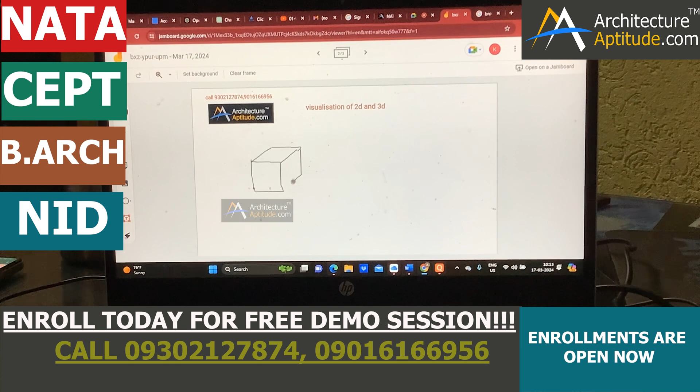Working now on the basis of planes. Okay. So you have to understand here that we will start with the simplest of objects, which is the cube. Now say that's a cube kept in front of you. Visible? Yes, ma'am. What do you see? Simply, can you conclude what do you see? Square. Only a square? Square faces. Square. Lines. How many faces? I can observe 3, ma'am. Actually, there are 6. Perfect. So that means you are talking at 2 levels.

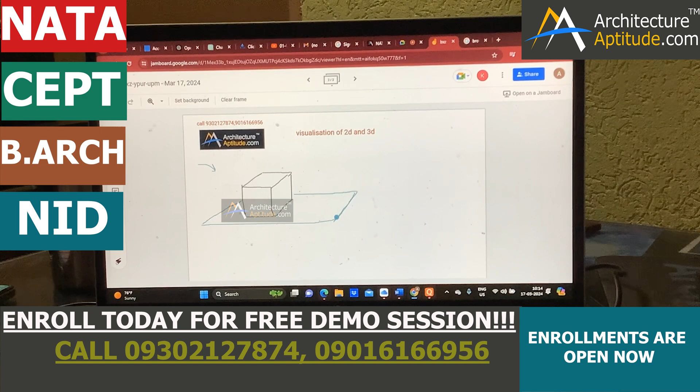Now look at this. Suppose you are standing here and the green base, this is the surface area over which the cube has been kept. Okay. Now currently Arjun is standing here and you are looking at it this way, right?

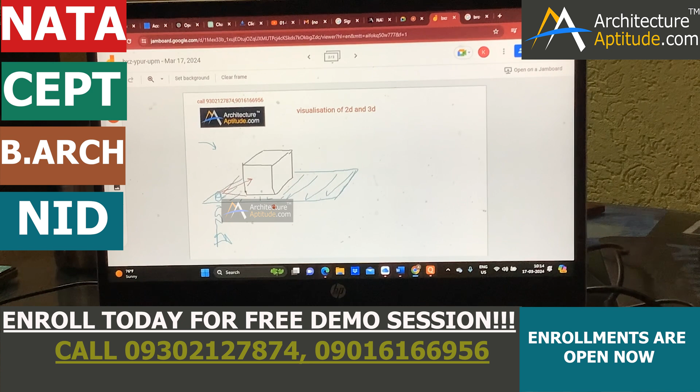Can you see that? Ma'am, your voice is breaking. Can you hear me now clearly?

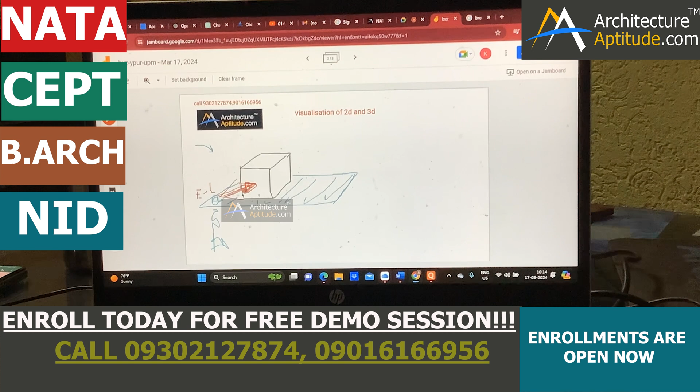Yes, ma'am. Good. So I'm asking you that you are standing here and you are looking at the object which is a cube placed at your eye level. Okay. Now what do you see? If you're standing at this position from where I have marked the red arrow, what will you see? Can you relate from the marking position? Just a square, ma'am. Just a square. Too good. So that means since it's at your eye level, you will just be seeing the red square, right?

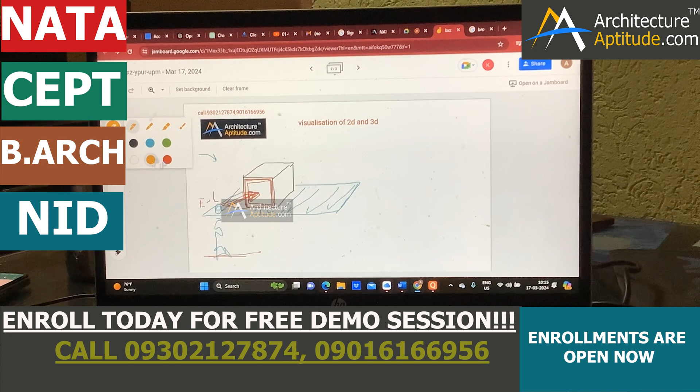Now I ask you to move and stand on this side. Now that's your position number 2. And I ask you, still at the eye level, what do you see? Yes. Just at your eye level, you have gone towards the right side. What do you see? Are we able to relate the positions?

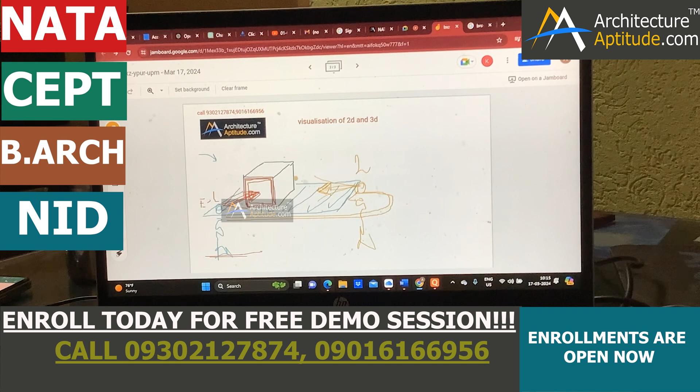Face. You have to say that again. Face. The voice isn't clear, Arjun. Face of the cube. Yes. So this time when you see the face of the cube, what do you see as a shape? I can observe. Do you observe a square or an inclination? What do you observe?

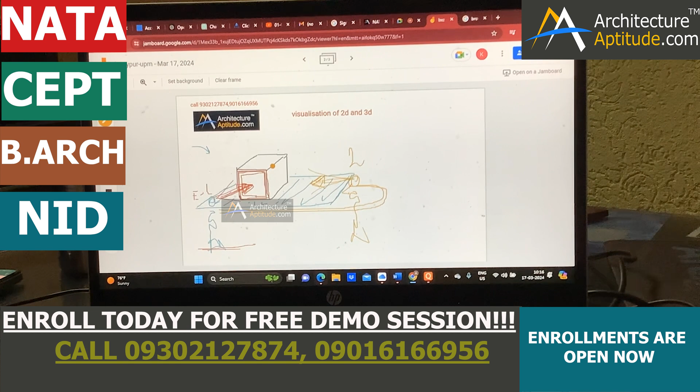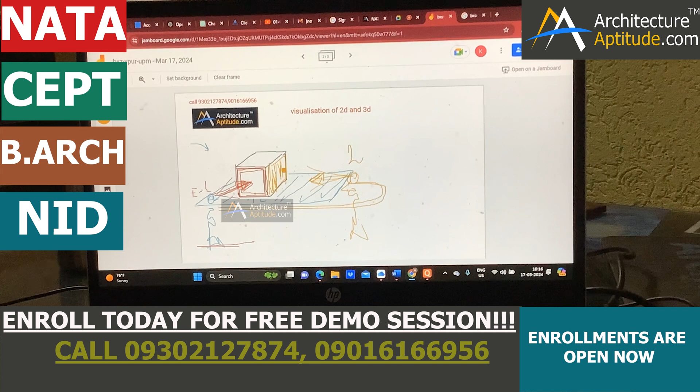I'm unable to catch your audio at this moment. You have to repeat or be a bit louder. Yes. Can you please reconfirm? Your audio is not coming as of now. Now, believing that you said that you can see the square, I'll wait for the time you get connected again.

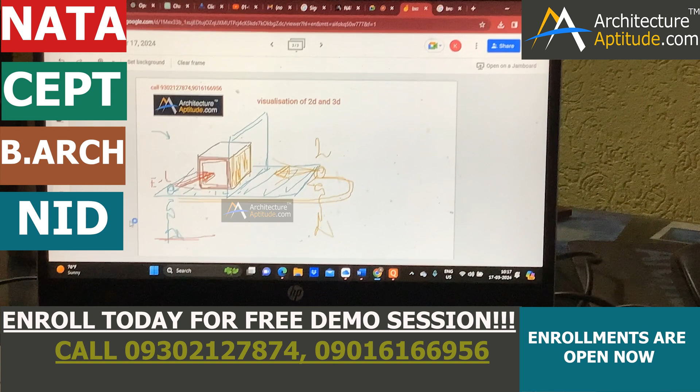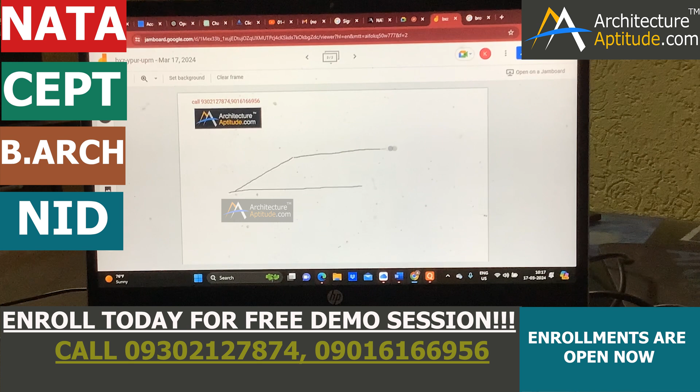In the meanwhile, we will try taking up this in terms of orthographic projection. Okay. I hope by the time you check with your audio options, I will summarize in the meanwhile for the visualization here. When we say that we are going to visualize an object, we have to actually place the object on a surface. Now say suppose we start with, yes Arjun?

Your voice is breaking. Okay, can you hear me clearly? Just confirm me in chat maybe. Yes, ma'am. Now I can hear.

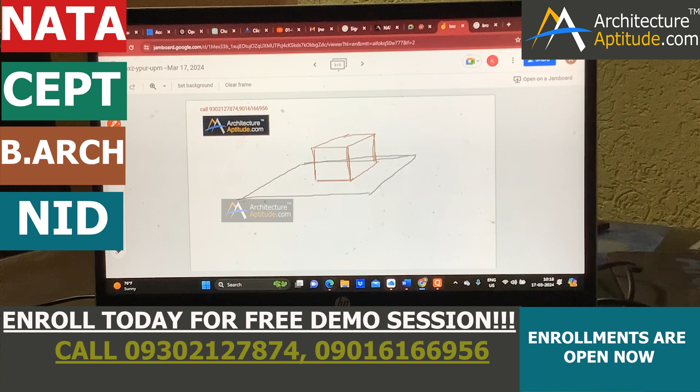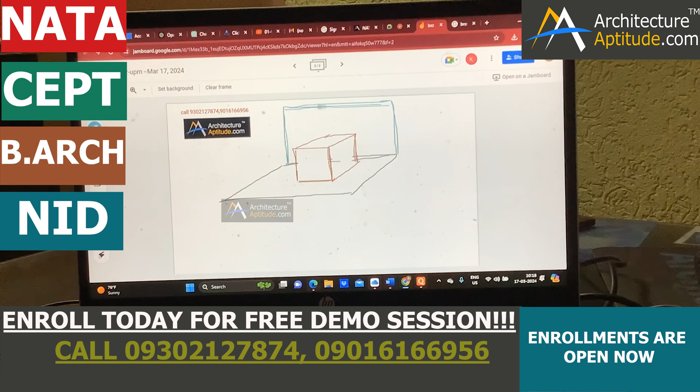Good. I will start to brief with how do we project this object. Okay, see this. We are actually going to place the object on a base plane which is horizontal, and for your understanding purpose, can you see the blue line up at the back? That is another plane at the vertical fascia at the back of the object.

Now, when I say that you are standing here and seeing the object just at the eye level, this means that I am going to see the object from this direction at the eye level, and this will actually portray what you marked out, the red square. The only thing is it's actually an image which is formed as a square somewhere at the back on an imaginary plane.

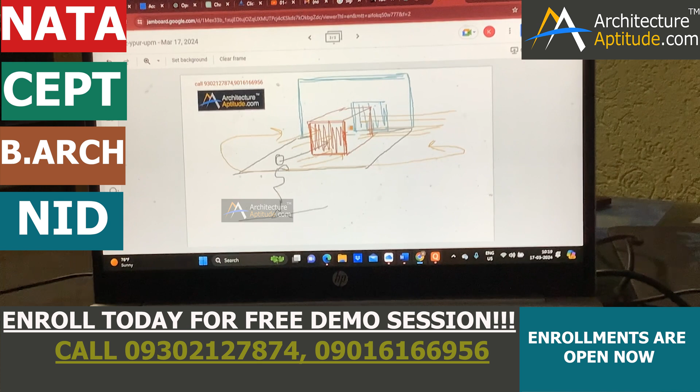Likewise, when I go to the right side or the left side, the same thing happens. Since I'm visualizing the object at the eye level, I am actually visualizing the object just at 90° from this position. I will still see a square from the right side or from the left side. I think that is what you mentioned, that though the object has 6 faces, you are able to see only 3. Correct? Yes, ma'am.

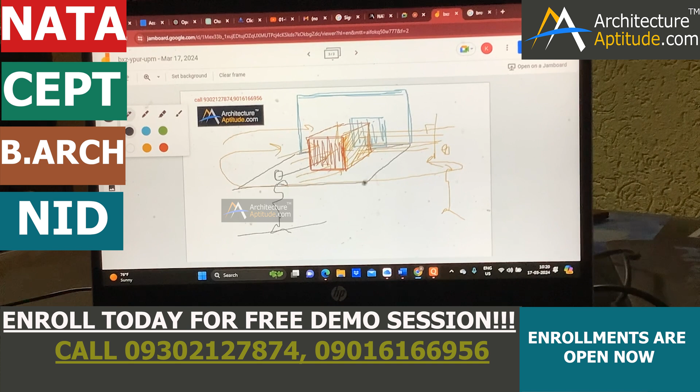Now, if we just believe that there is another imaginary vertical plane here, it's like you are projecting out and you are seeing from all the directions just 6 squares for yourself. Correct? Yes, ma'am. The only thing is, there is a technical way of making these squares to be visually understood.

There is one position still left. What happens when you see the cube from the top? Can you tell me? What happens when you see the cube from the very top? In a way, I should say that I can observe a square, ma'am. Again a square. If I say that this is the front elevation direction, you have to elevate yourself, go above, and just overlook the object, and you still see a square.

Now what we'll do is, we will transform this entire thing, which right now you are able to see in 3D. I am going to translate this entire thing into a beautifully done 2D, which is formally called orthographic projection. Okay? Okay. Just believe, see this. I said that this, and towards the left side you have some imaginary planes. Okay?

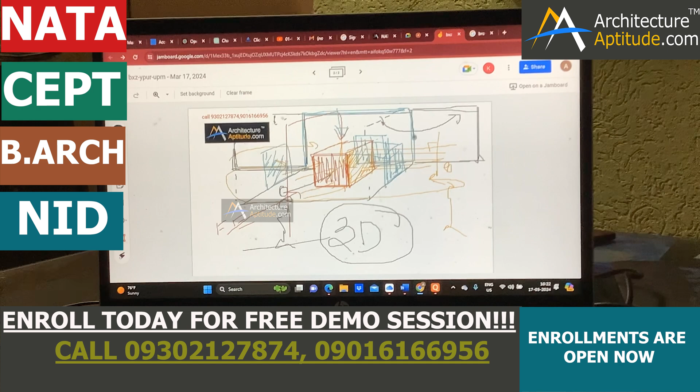Now if you believe that this is just a carton box or maybe a surrounding made out of folded paper sheets, I say just pull this and take it towards the side and place it here, just like unfolding a pastry box. Okay? The same way, this left plane also, just unfold it and take it towards the left side. Can you get that? Yes, ma'am. So it's basically the front side. Can you see the black lining? I have the first plane, the second plane, and the third vertical plane, right?

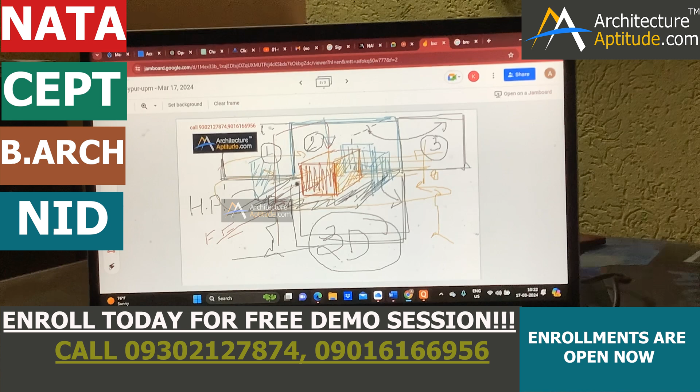Yes, ma'am. The same way, this base plane, the one which I made at the base. Okay? Yes. This is called HP, horizontal plane. So if I just outstretch, unfold this, and I take this at the bottom. Okay? Yes, ma'am.

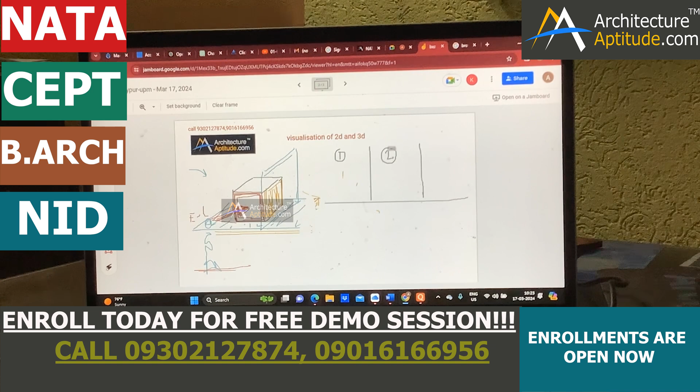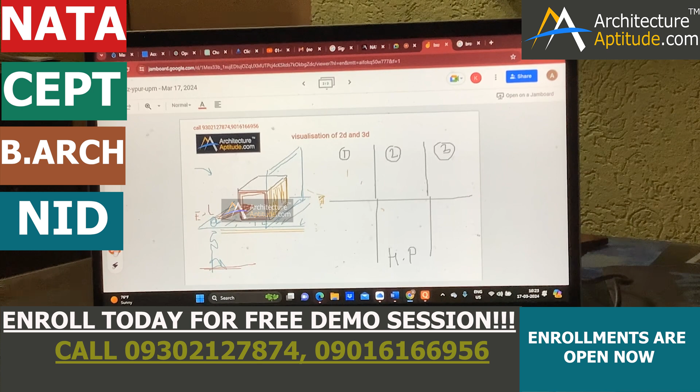What happens now is, see this. When I unfold all of them and I just try to draw that here, that's the line over which you had the first vertical plane, the second vertical plane, the third vertical plane, and what came below was what? The horizontal plane, right? Yes, ma'am. What did we see on the second vertical plane? Should I say a red square? Yes, ma'am. Great. So what was coming on the second vertical plane is basically a